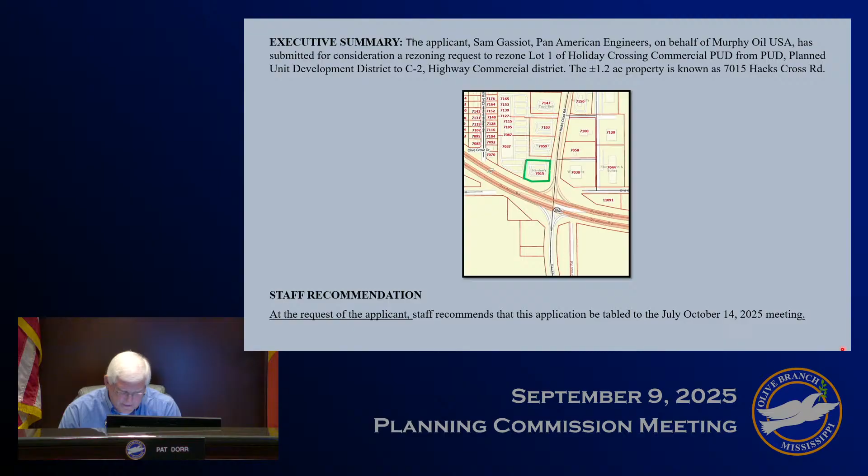I'll make a motion to table. We have a motion by Mr. Jones to table it. Do we have a second? Second, by Mr. Long. Any other discussion? If not, those in favor signify by saying aye. Any opposed? So the motion carries, and this application will be tabled till the next meeting.

I know there are some people here that were here for this particular item, and we'll take it up next month.

Under new business item number 2, we have an application for a final plat for Haygood Minor Lot Subdivision submitted by Bob Farley, Farley Surveying, on behalf of Jason Haygood and Amber Haygood Rotenberry, property owners. The request is to subdivide 5.88 plus or minus acres into 3 lots. The subject property is zoned AR, Agricultural Residential District, and is located on the east side of Davidson Road, approximately 850 feet south of Timber Oaks Drive, known as 6292 Davidson Road. We'll now have the staff presentation.

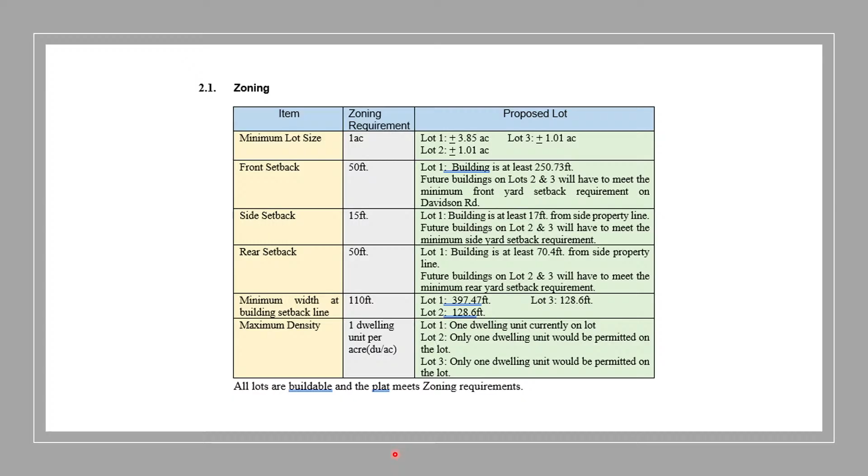These other two lots, when they're built, we ask that the driveways be paved and plat notes be added for that. In the AR district, sidewalks are not required, so that would be waived in this particular plat. Our next step would be, upon recommendation by the Planning Commission, that the plat be forwarded to the Mayor and Board of Aldermen for consideration. The plat would need to be recorded, and once recorded, the lots may be sold or building permits obtained, in accordance with the applicable city's land development regulations.

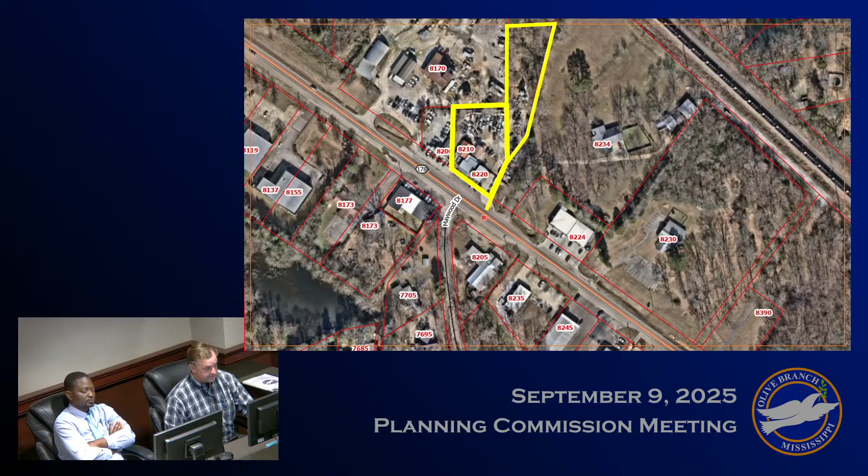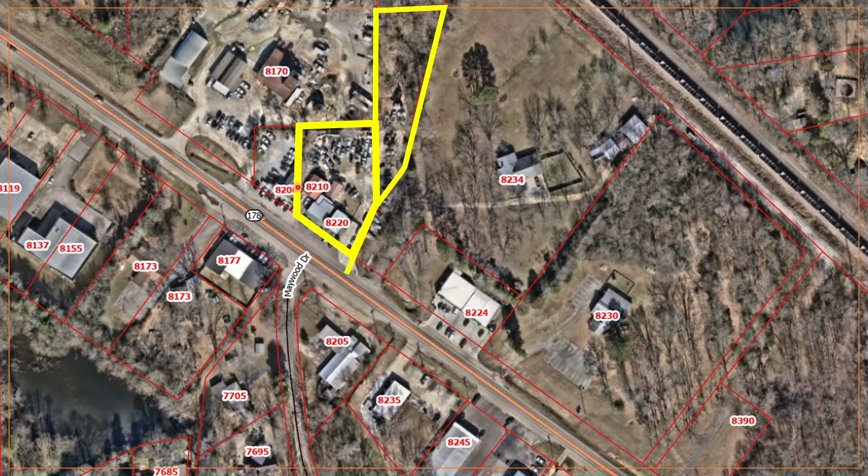Again, bringing you up to where we are here, Planning Commission. If we follow the cursor north on Highway 178, we come up to Maywood Drive. Neighborhood Grill is here, and Sergio's is right beside them. These are the two parcels we will be talking about. One is vacant and one does have an existing building. As we get into this presentation, we'll discuss that this existing building is a non-conformity, and upon demolishment of the building, we would ask that it be built behind the setback lines. So that's something we're going to approach as we move forward here.

So again, as the commissioner said, this application seeks a final plat approval to combine two parcels into one lot. As I noted, this lot to the north is a vacant lot, and this lot to the south does have existing buildings on it. You can see this building here actually sits over the 5-foot utility easement, and the note says the utility easement is to be reconnected if this building is demolished. So if that building were to be demolished, we ask that the building be put back behind the setback lines.

So the lower parcel is currently used as an auto repair shop - these are the buildings right here where my cursor's at. This parcel to the north is an empty lot in which they plan to put up a fence and move some cars onto for staging for repair. Platting the parcels is a necessary step toward the possibility of obtaining a building permit, which is what he plans to do in the future for development on the property. I will state up front, this is not a truck drop yard - this is just for Sergio to have auto repair on.

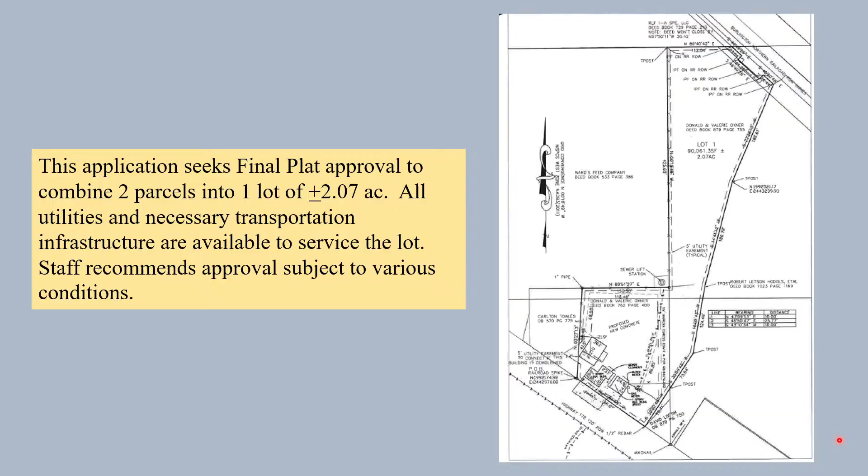So as you can see here, I've got a picture of the two parcels we're talking about, to combine them into this lot 1, 2.07 acres. As you'll note here, I've got some yard requirements - everything is met except for the buildings. These are non-conformity buildings, specifically 8210, which is over the utility easement.

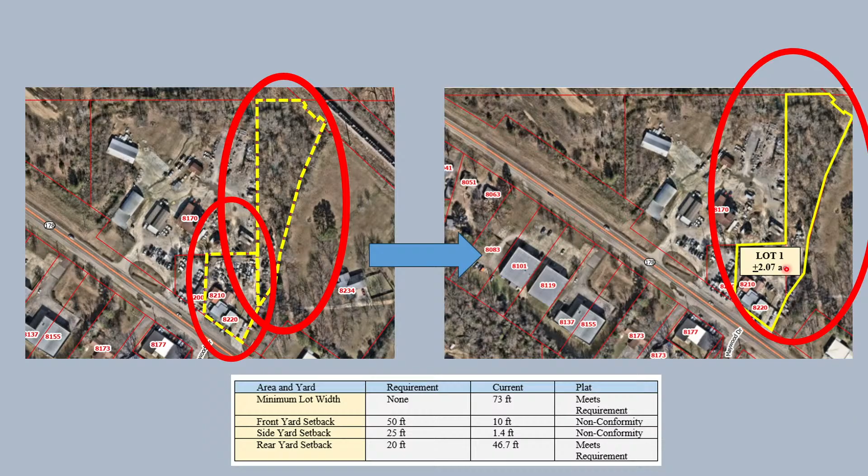We would ask that if the buildings are torn down, they would be built behind the setback lines. This is our new lot, and hopefully this lot built out so he can move his cars. These are the buildings here, and this line goes away, and the lot becomes 2.07 acres. The lot fronts on Highway 178. There's no construction needed, so no bond would be needed.

This building involves a variance, or somewhat of a deviation. Existing buildings are non-conforming regarding the front yard setback, and a deviation from any standards of subdivision improvements is not warranted. This is a minor plat, not a major subdivision involving significant infrastructure. All we're saying is if the building is torn down, we would need to move it behind the setback lines. In this case, no waiver is needed.

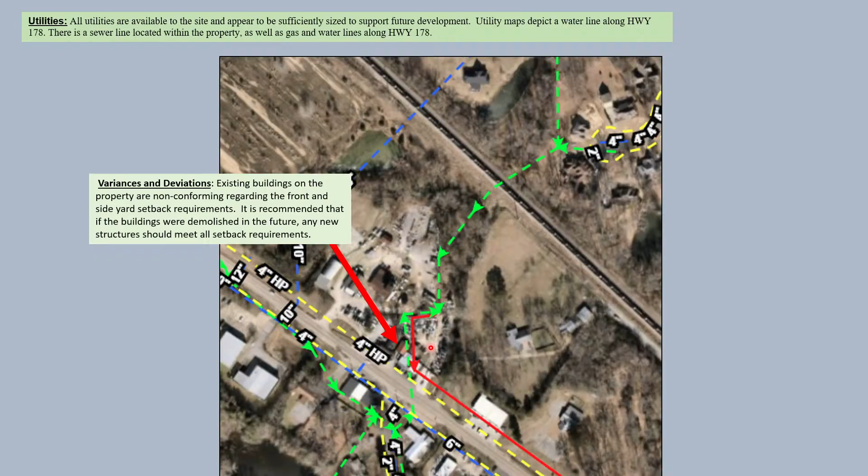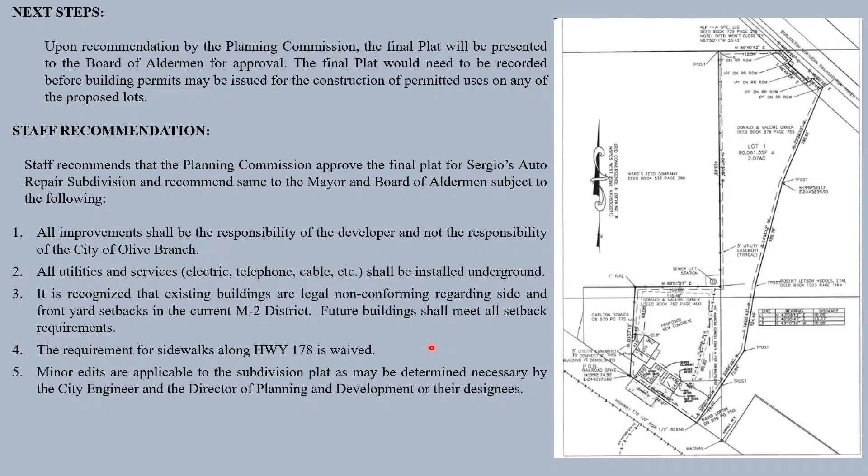There are no sidewalks within the vicinity, so it's recommended that sidewalk requirements be waived for this minor plat. Our next steps: upon recommendation by the Planning Commission, the final plat would be presented to the Board of Aldermen for approval. The final plat would need to be recorded before any building permits would be issued for construction or any permitted uses on any of the proposed lots. Staff recommendation is to approve the final plat for Sergio's Auto Repair Subdivision.

We recommend the same to Mayor and Board of Aldermen. We've got conditions 1 through 5. Again, we want to recognize in number 3 that existing buildings are legally non-conforming regarding side and front yard setbacks in the M2 districts, and future buildings shall meet all setback requirements. That concludes staff presentation. Any questions of staff?

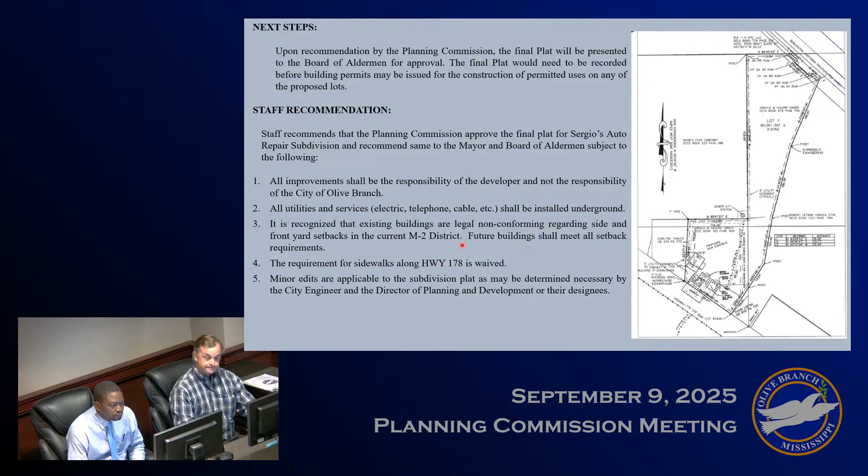I've got a question for staff, on the drawing. The owner's certificate says, 'I, we, Amber Haygood Rottenberry, and Jason Haygood, as owners of the property, hereby adopt this plan,' but then it's got Donald Oxner Jr. and Valerie Oxner as the signatures. Is that document correct?

That sounds like a question Bob will be able to answer and fix, as he was working on both the former presentation and this one. Sounds like a minor edit he'll have fixed before we get to Board of Aldermen, but I'll let Bob confirm that. Any other questions for staff?

Mr. Farley, if you please come forward, you may be able to answer that question. It's one of those minor edits. I just want to make sure I'm not approving something for Amber Rottenberry and Valerie gets upset. That's one of those minor edits, Mr. Jones — you can look at them a thousand times and you'll overlook things every time. Oh, that would be corrected. All right, I appreciate that.

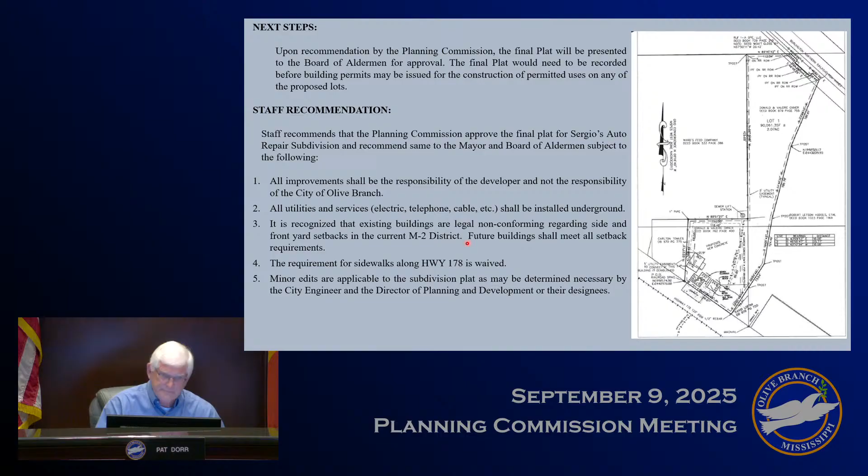Good job. We have an application for a final plat for Olive Branch Logistics Park, Lot 1, submitted by Jarman Paragoy, P.E., Kimley Horn and Associates, on behalf of Land Grant LLC, Mark Boulding, property owner. The request is to subdivide 72.33 plus or minus acres into a 67.88 plus or minus lot and 4.45 plus or minus acres of right-of-way to widen Kirk Road and extend South Crossroad Drive. The subject property is zoned M1, light industrial, located on the south side of Kirk Road, approximately 760 feet east of Polk Lane.

We'll now have staff presentation. You may recall what you're seeing on the slide. Back in July of this year, you recommended approval, and then on August 19th the Board of Aldermen approved a preliminary plat to subdivide about 220 acres into 3 industrial lots and rights-of-way and 1 common open space, supposed to be over 3 development phases.

That property outlined in blue is on the south side of Kirk Road, to the east of Polk Lane.

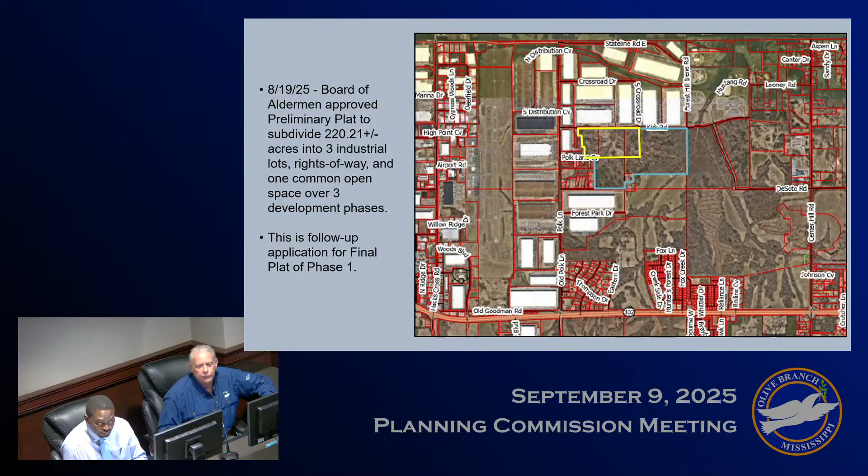What we have tonight is a follow-up application for the first of the 3-phase development phases. It's to plat one lot and do some improvements of right-of-way. This shows you a sketch of what this plat is proposing to do.

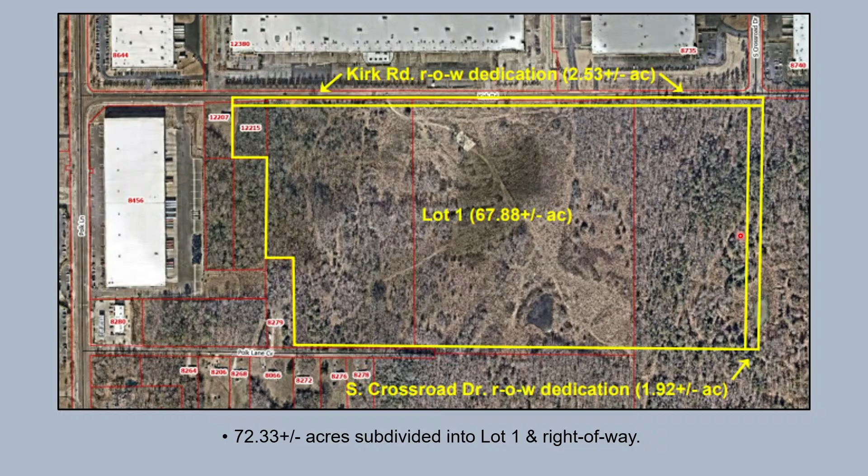It's a total of 72.33 acres being subdivided out. Lot 1 is about 68 acres in size, and the division also includes additional right-of-way dedication of about 2.5 acres along the north side of Lot 1 to widen out Kirk Road, and a little bit under 2 acres along the east side of the property to extend South Crossroad Drive through the development.

This next slide shows the preliminary plat exhibit. What's shaded with the crosshatch and dark gray was basically what the preliminary plat showed would be the first phase of the development. So the final plat we have tonight is pretty much an exact match of what the preliminary plat showed.

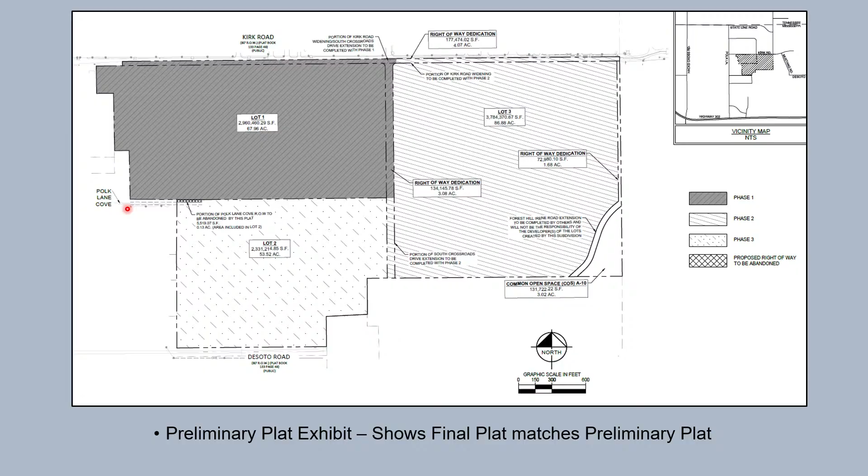This shows a copy of the final plat you're being asked to recommend on tonight. The applicant has actually submitted a site plan showing that Lot 1 would be improved with a 1.2 million square foot warehouse distribution facility.

On that same set of civil plans, they've included the road plans to widen out Kirk Road and also to extend Crossroad Drive. So whether you're talking about a single-family subdivision with a house that's 2,000 square feet, or a big industrial subdivision with a 1.2 million square foot warehouse, the process for subdivision is the same.

What that means is that you have to record the subdivision, get it approved and record it before you can get a building permit to go vertical.

One of the differences with this type of subdivision is the plans show the public improvements as well as the vertical improvements with the warehouse all in the same plan set. So the applicant will need to record a letter of credit to cover the cost of the public improvements, to build that new road and widen out Kirk Road. But that's really the only difference.

That's very common when you're dealing with these big industrial projects, that they do all of the construction at the same time because of the massive scale of those projects, as opposed to a residential subdivision where you'd basically build the roads and utilities first, get it recorded, and then pull individual permits for your single-family homes.

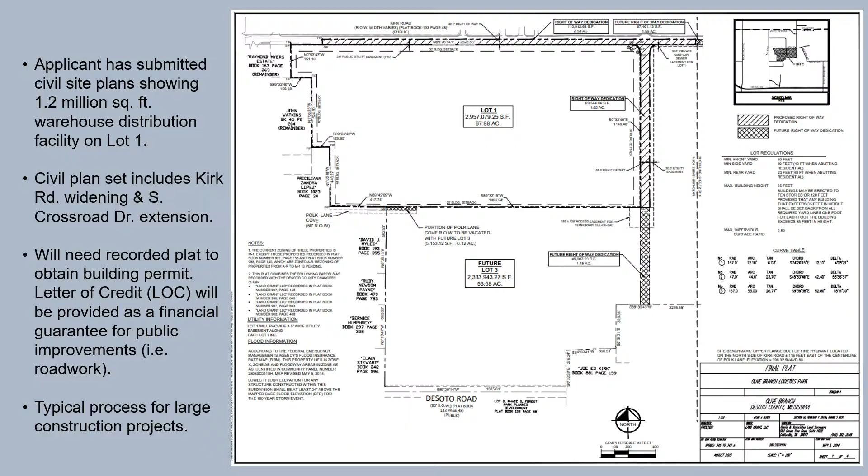So we're pretty much typical on that. We do have a recommended motion that you would forward up to the Board of Aldermen to subdivide the 72.33 acres as shown, subject to the exact same conditions that you recommended back in July for the preliminary plat.

I did want to mention in number 4, just to remind you that this phase 1 construction does include the Kirk Road widening and construction of South Crossroad Drive abutting Lot 1. Again, we'll have the plans under 6 and 7 approved by the city engineer with the appropriate letter of credit given to cover the cost of those off-site improvements.

I did want to mention also number 10, that we in all likelihood will have overhead electrical transmission lines down South Crossroad Drive. I doubt that they have electrical plans done yet, but that's just done in anticipation, because normally we would say that all of those would have to be buried.

So that concludes the staff presentation. I'd be happy to answer any questions. I see Jarman Paragoy's here from Kimley Horn, who could probably answer anything in more detail than me.

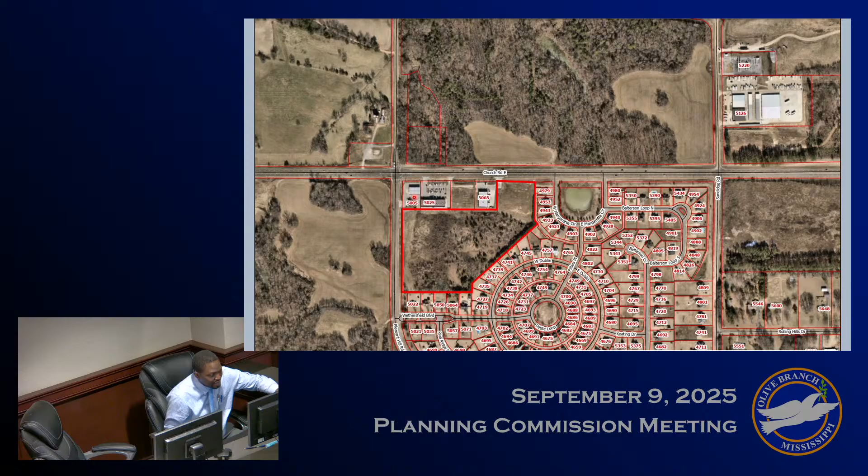Phase 1 is essentially developed, with a gas station at this corner lot, a strip mall with some restaurants and offices at this location. This is currently vacant, and then you have a Dollar General. Further to the east is Margaret Manor residential area, and lying between that is this piece of property which is the subject of the preliminary plat application before you today.

Generally, this lies south of Church Road and at this easterly corner with Pleasant Hill Road. There's a Sandidge Road over here. The dump area will be to the north at this location. So you're looking at that vacant piece of property within this general area.

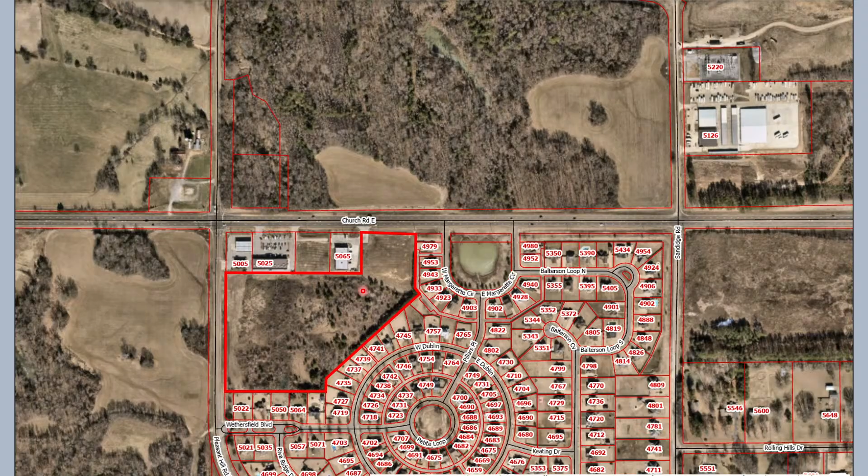The Margaret Manor PUD, if you look at it, this is the area in the PUD. It has generally developed as it was planned conceptually. Initially, you had those two out parcels or lots, you can say. Others have been added. This is the reality that you have on the site today, and this area is really what is the subject property under consideration.

As you see, it was conceptualized in the preliminary layout plan. You had a connection here going onto Church Road and a connection here going onto Pleasant Hill Road, basically at this location and at this other location.

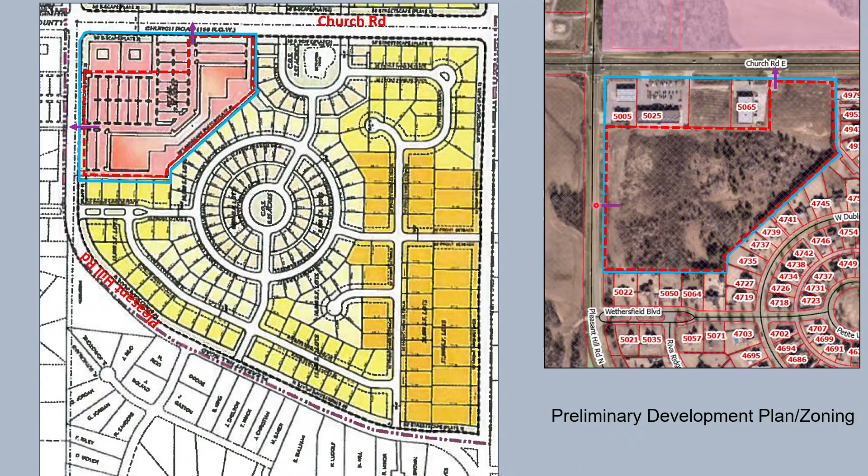So the preliminary plat before you contemplates creating essentially 16 lots. So you have lot 1, lot 2, lot 3. These two are kind of together, and then you will have lot 4, lot 5, 6, 7, 8, right up to lot 16 of the Margaret Manor.

This is preliminary. These are all preliminary lots. The number of lots can change significantly by the time you get to final plat. It may end up being 1 lot, may end up being 2, may end up being 3. So these are just preliminary.

Currently, you have a private drive, basically a shared access easement between lot 3 and what would be lot 4. That is platted as an easement and is private. The applicant proposes to make that public, to be dedicated as a public street via final plat. And with that dedication, this is really the reason you have this before you as a preliminary plat, because once you start constructing public infrastructure in any subdivision, a preliminary plat is required, even if it's just 1 lot.

The key interest here for the applicant was lot 4 and lot 5. Lot 4, because this has prospective for the Waffle House restaurant. Lot 5 doesn't yet have anything fixed at this time.

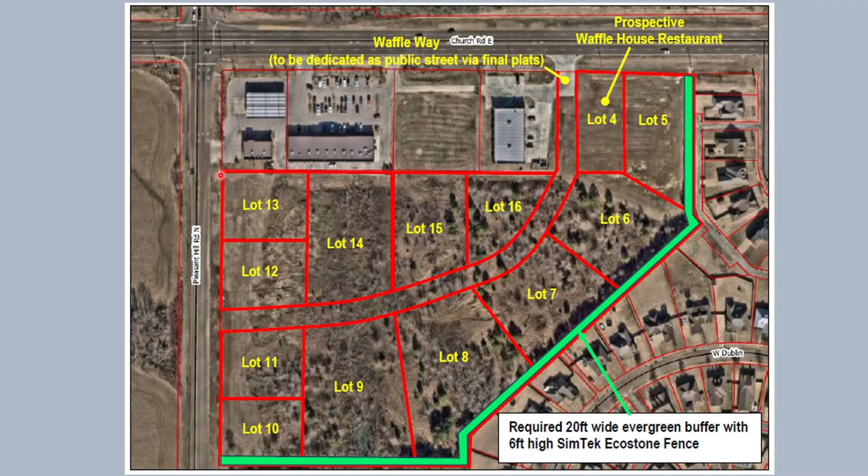Condition number 7, sidewalks shall be constructed along the Pleasant Hill frontage of the property. If you look right here, there are sidewalks shown, with that little wide area. Those are sidewalks that were constructed on Pleasant Hill Road from that gas station right up to this location. The residential area at the back of the property also has sidewalks, so it's important to fill that area so we can have a continuous sidewalk along Pleasant Hill Road. That's precisely what condition number 7 addresses.

That concludes staff's presentation. Thank you.

Any questions of staff? Between lots 4 and 5, do they have access easements? Lot 4 and 5, yes, that will be front and back, addressed in the final plat. Okay, gotcha.

Any other questions? If no further questions, do we have someone here to represent the application? If you'll please come forward.

Good evening, I'm Andrew Link with Waffle House of 5470 Chemin de Vie, Atlanta, Georgia. I'm just here to answer any questions you might have.

Anyone have any questions? No questions, then thank you.

Once again, I'll open this up for public hearing. Anyone here for or against this application that wishes to speak? If not, then the public hearing is closed, and I will now entertain any comments, discussion, or motions from the commissioners.

I make a motion to approve. We have a motion by Ms. Singer to approve the application, subject to the staff conditions. Do we have a second? Second, by Mr. Stratton. Any other discussion? All those in favor say aye. Aye. Any opposed? The motion carries and the application is approved.

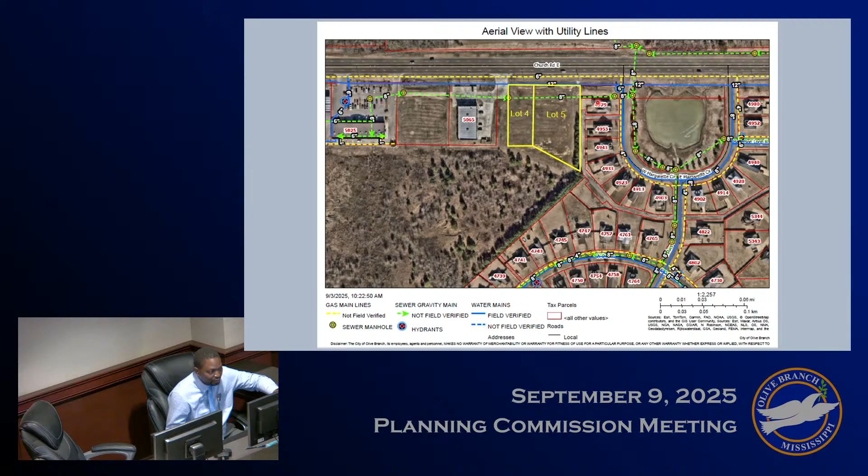As I indicated, utilities are available in this area. There's an 8-inch sewer line, a gas line along Church Road also, a 6-inch line there, and a 12-inch water line. It will be the responsibility of the developer to extend those lines to service any development on these individual lots.

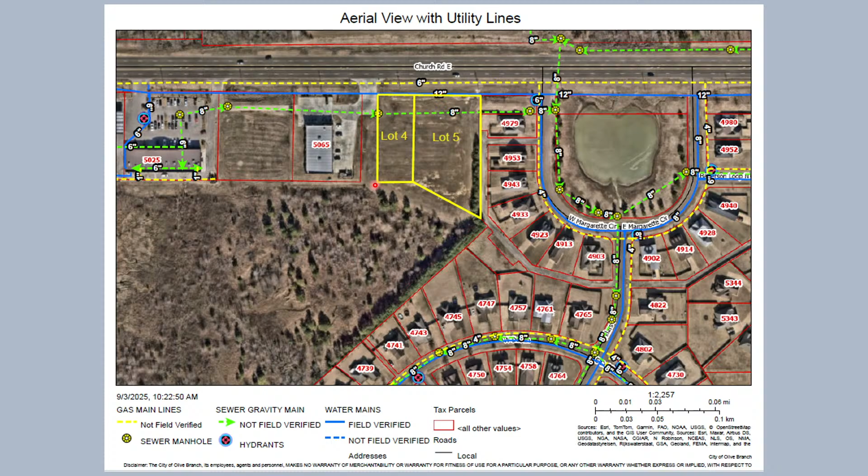This is the area that is requested to become a public street upon the recordation of this final plat. The reason these final plats for these 2 lots are before you is because Waffle House Incorporated intends to develop lot 4 for the Waffle House restaurant. So everyone on Church Road, you can go there and get a waffle once this is done.

Yes, lot 5 for now is going to be vacant. We don't have any specific development proposed on lot 5 at this time. As far as the site plan and building elevations are concerned, those are reviewed and approved administratively by staff. But the plat, every element dealing with the subdivision infrastructure, the street construction, the street names, the sidewalks on the streets, the utilities, the lot layout, the buffering, all of that is subject to this particular plat approval.

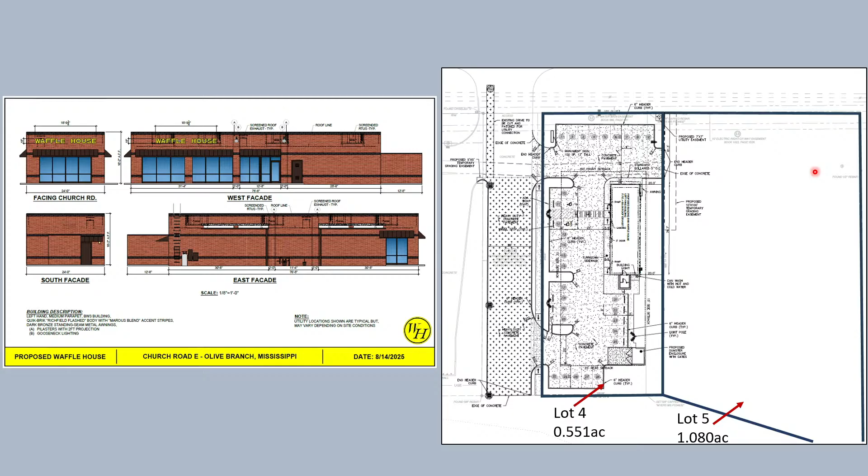There was a question asked not long ago in terms of cross-access easement. So there is a 25-feet cross-access easement that will link Lot 4 and Lot 5, shown here, so it will be 25 feet wide. Basically, this drive aisle is intended to extend across Lot 5 when that is eventually done, and it should provide access. One of the conditions for approval is that the developer of Lot 5 will build a sidewalk connecting Lot 5 to West Margarette Circle.

The reason here being, it should be possible for residents in this subdivision to walk, get on that easement, and walk and eat in that area. In the evening, if you want to get a waffle, you could just walk out there, eat, and go back, instead of having to drive down on Goodman Road or Church Road and deal with the traffic and all the turns.

So that is the reason why you have that particular easement. Or if you just want to walk in the evening and get a gallon of milk from Dollar General, you don't need to drive. That should be possible. Now, the fence, as I indicated in the preliminary plat review, a SimTek Ecostone fence was required by the Board of Aldermen to be constructed on these property lines, in this 20 foot wide buffer. What you currently have out there is a wood fence. The board has never amended that particular condition.

As such, it is being maintained here. Once we have these developments going through, I've asked to speak with the property owner tomorrow about putting in this fence. The board order was very specific on what type of fence should be out there. It specified that it should be similar to the one constructed on Pleasant Hill Road behind Sports Academy — basically this fence here, the SimTek Ecostone fence. That is what was required out there.

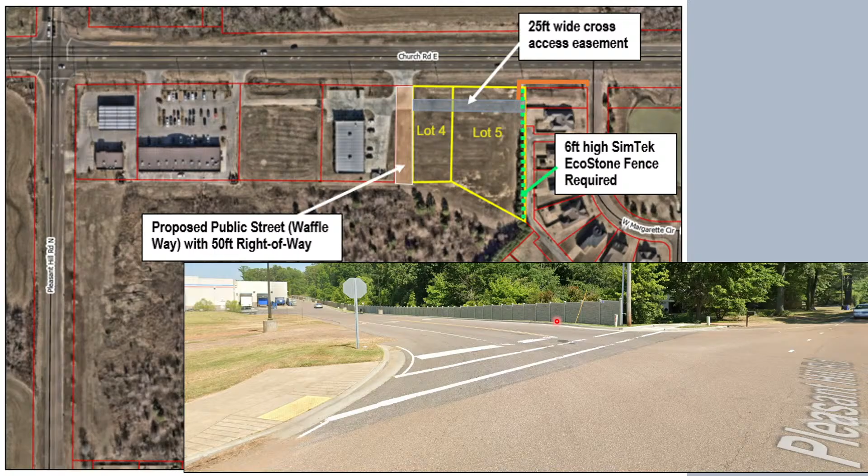This is the final plat. That is the easement we talked about. And the requirement for that sidewalk construction is all written as notes on the plat. The road is proposed to be named Waffle Way, and there's a bit of a question mark on that. Generally, as a matter of practice in street naming...

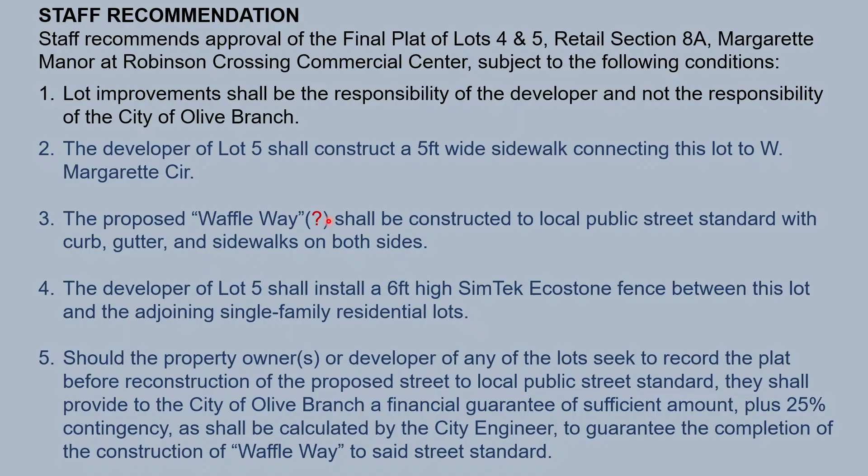A road would take the name of a very specific business when that road services maybe a corporate area. So if we have Google come to the City of Olive Branch, for example, and use an entire Google campus, you can name the roads going into it Google Drive, that kind of stuff. But when you have a potential for multiple lots with different businesses on those lots, giving a single name attributed to one business can become a disincentive for others in that area.

Now, subdivision regulations do not address this very specifically. It's a matter of the Planning Commission's recommendation and the Board of Aldermen's decision on what you want as far as that name is concerned. But the name is final — whatever name is recorded on the final plat and approved will become final. So that is open to the Planning Commission's recommendation.

Condition number 4 addresses the need for that fence to be put in once Lot 5 is developed. And should the property owner — condition number 5 — this is most likely what is going to happen, since Waffle House intends to go in and start construction to pull a building permit and start building on Lot 4, you will need to post a financial guarantee for the construction of the road in order to record the plat and then get a building permit. That's what condition number 5 addresses.

Lastly, the written consent of the owner of Lot 3, that's the Dollar General lot, is required regarding the dedication of the proposed road as a public street. That consent needs to be submitted to the planning staff before this plat is considered by the Board of Aldermen.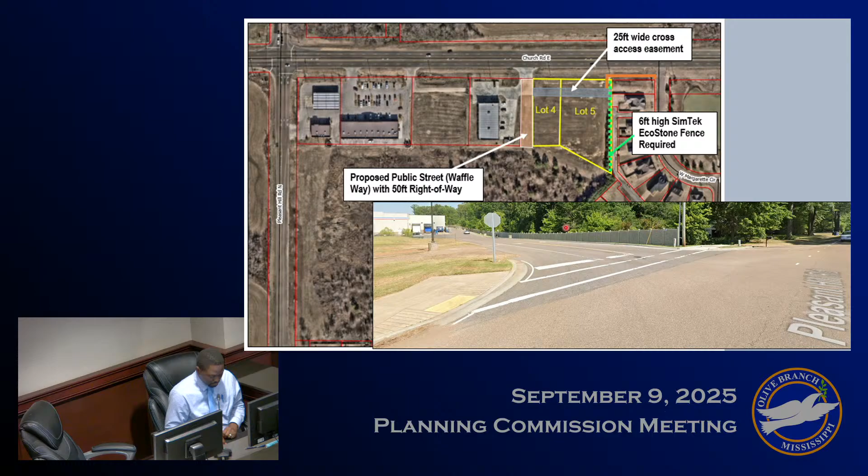The reason being, the plat for Lot 3 stated that driveway — what is a driveway? Basically, this is a private easement for the benefit of Lot 3 and the rest of the property. So if you're going to then turn it into a public street, the owner of Lot 3 has an interest in it and needs to consent. I think they've been working on that already. That concludes staff's presentation. Thank you.

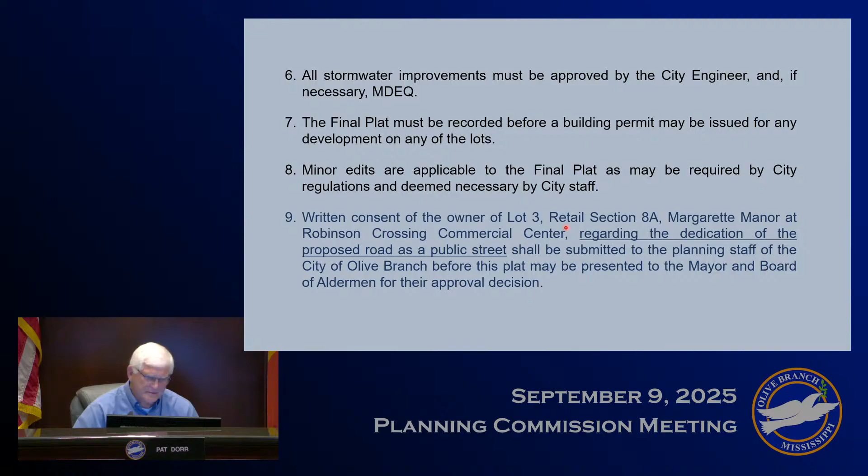Any questions of staff? Yes, could you pull up the drawing that had the location of the restaurant, where it would be placed? No question, I'll wait for who's presenting, I have a question, but leave that up there. Anyone else? If not, please come forward and represent the application.

Andrew Link again with Waffle House, 5470 Chemin de Vie, Atlanta, Georgia. Here to answer some questions.

Just a quick question. The location of the restaurant and most of the lights are gonna be toward the building. My concern is we're gonna have a half-completed road next to, I think that's a Dollar General, and a Waffle House. Will you consider, working with the engineer, to ensure that's properly lit so we don't have people parking at the end of that street in a dark area next to a Dollar General and a Waffle House? So essentially street lights along that road.